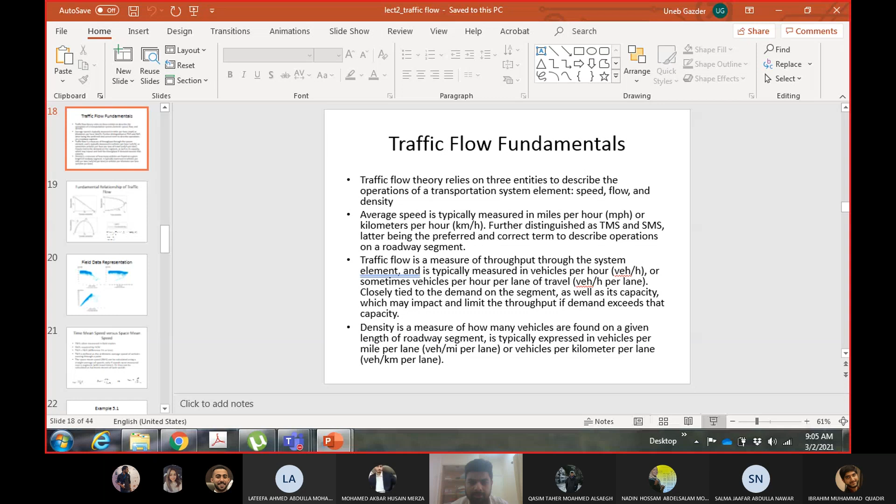Okay, so the topic which we are starting today, we will see a lot of things coming from the traffic engineering course. So it will be a refresher for you. So traffic flow theory depends upon three main characteristics of the transportation system. And these three main characteristics are speed, flow, and density.

Traffic flow theory, let me explain it. Traffic flow theory basically means the set of equations which we have to estimate and predict traffic flow, or the operations of traffic flow. Those set of equations are known as traffic flow theory. So these set of equations mainly depend upon three main characteristics of traffic: speed, flow, and density.

When we talk about speed, for traffic operations analysis or traffic flow analysis, we use average speed. And obviously speed can be in miles per hour, kilometers per hour. I think this much you should know and you will remember. Then this average speed can be TMS or SMS. Can someone tell me the full forms of these terms, TMS and SMS? And these are not messaging services, believe me.

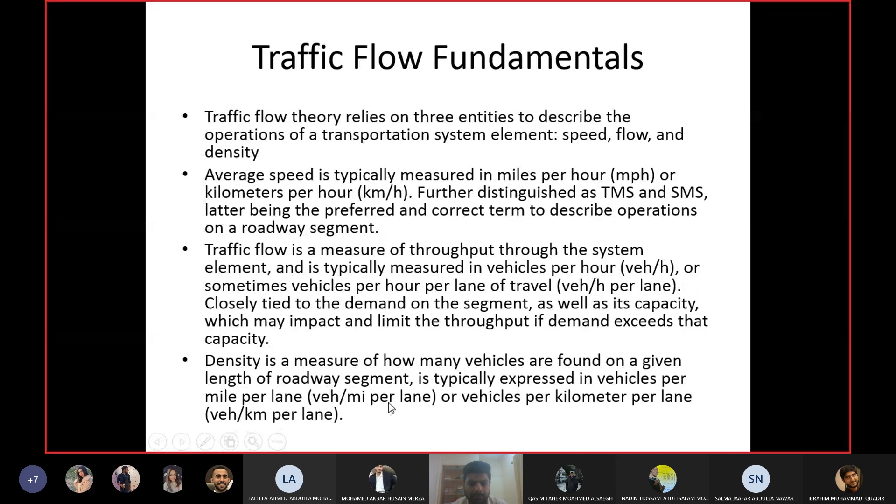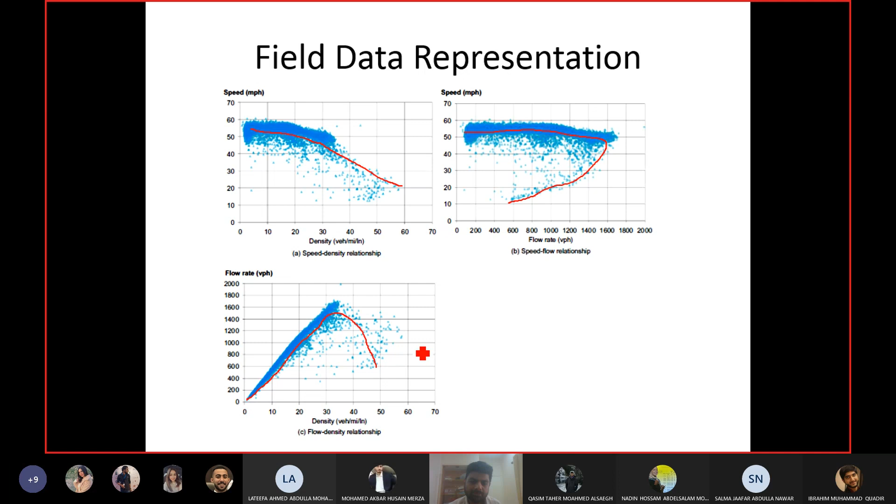So we collect field data, and then we try to come up with some equations which are best suited. I think I explained this in the previous chapter. All models are wrong, but some are useful. So these are the most useful models we have. They have some differences, some errors from the field data, but these are the most useful models we can have.

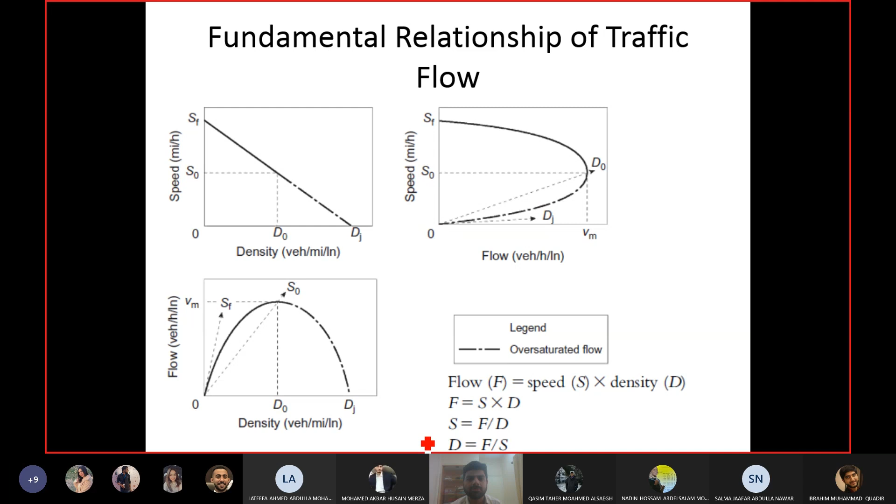Okay. Then we have, like you mentioned, time mean speed and the space mean speed. So now we are going into more detailed discussion of these three parameters, speed, flow, and density. So TMS is mainly used in field studies. So you want to do a field study for a specific purpose, for a specific application, maybe accident analysis, accident investigation, for measuring the effectiveness of a speed bump or a traffic camera or something like that. Then you go for TMS studies. Otherwise, you calculate SMS, space mean speed. And this is the one which is required by the Highway Capacity Manual. So if you want to calculate level of service, capacity, or do traffic operation analysis, then you require SMS.

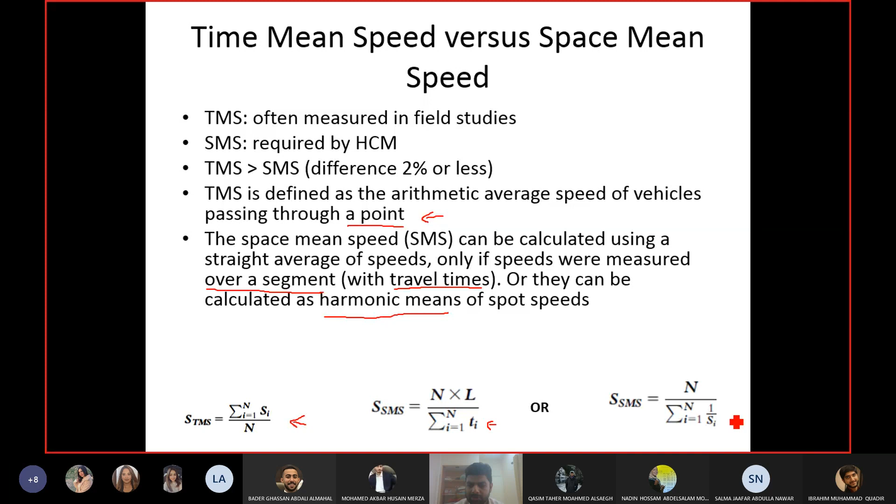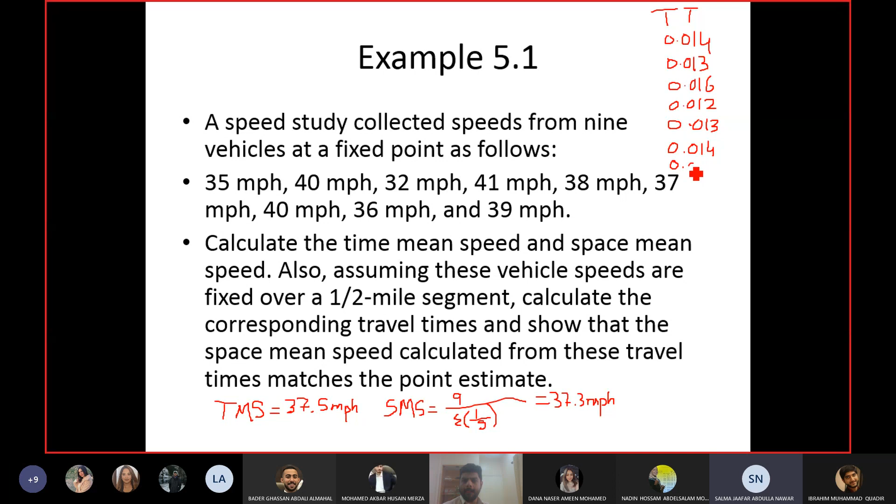The distance remains the same. 0.014. 0.013. 0.016. 0.012. 0.013. 0.014. Okay. 0.013 again. 0.014 and 0.013.

Okay, and their summation will be 0.12. 0.12. Okay, then the other equation of SMS says do 9 into 0.5 upon 0.12. And you should be getting this.

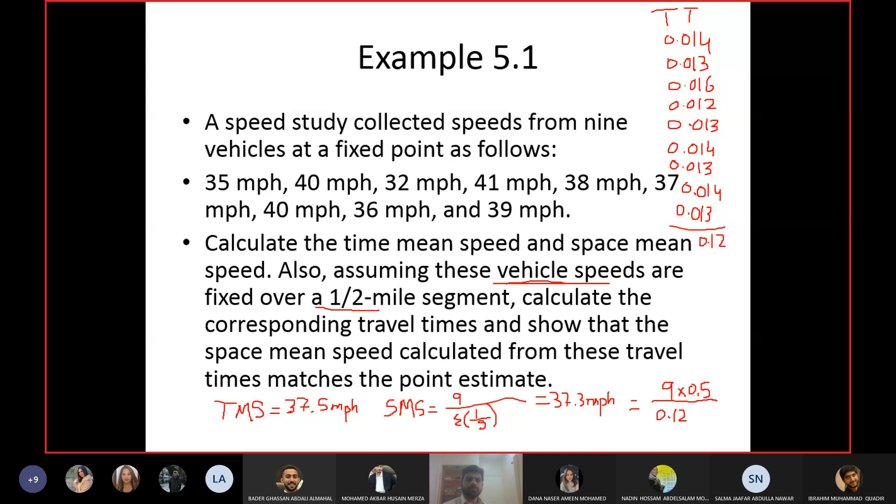Okay, so the parameters which we have discussed right now, speed, flow, and density, these are macroscopic parameters. Macroscopic meaning what? They describe the combined or aggregated. Aggregated means combined. When you are taking a summation of something, compiling something one over the other, that is called aggregation, adding. So this is the combined performance of the number of vehicles. So you take data for 15 minutes for example, and then you come up with a macroscopic parameter which is representing all the vehicles.

And these macroscopic parameters are used for predicting future states of traffic, how traffic flow is changing presently as well as in future. So this will describe the whole traffic flow. These parameters are relative to the whole traffic flow. For example, we just used speed. TMS and SMS were both macroscopic because they were calculated as averages. TMS and SMS came out from those 9 vehicles, so that became a macroscopic parameter because it is coming out of the data of 9 vehicles.

Similarly, the data which you have taken for your term projects, the 15 minutes vehicle counts, these are what? These are flow values. So again, you gave me one value, right? That in 15 minutes we observe this much flow, 600 vehicles, 700 vehicles, 500 vehicles. So this is one value which is coming out of all these vehicles. For the complete flow it is one value.

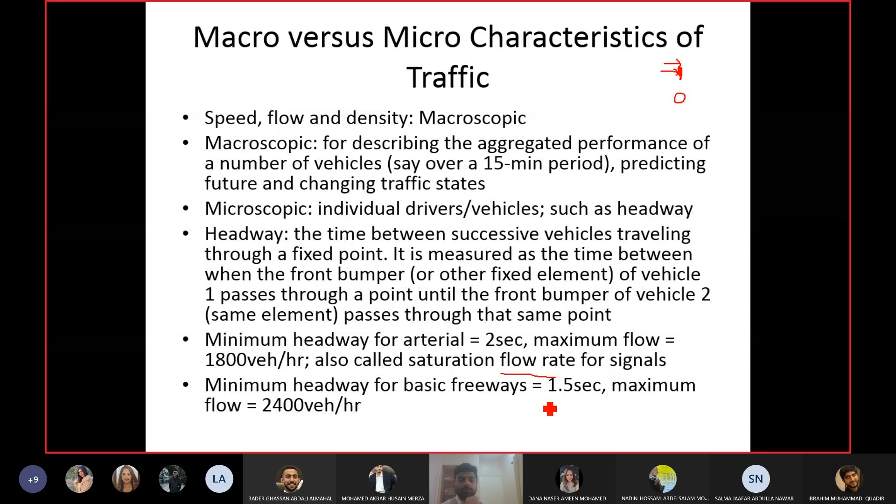And secondly, the headway is inversely proportional with the flow rate. You can see it over here. So when the headway increases, the flow rate decreases. So we have saturation headway, which is basically the minimum headway which you can have, which I showed you in the previous slide. The 1.5 seconds and the 2 seconds are basically the minimum headway.

The saturation headway is basically the minimum headway which the drivers can keep between each other. Saturation headway is that minimum value which the drivers are willing to keep between each other, which they consider safe for themselves. So 2 seconds for arterials, 1.5 seconds for freeways, according to their own data, the data which they have collected in USA. If you have doubt, collect your own data, no problem.

But it is not possible that on all segments of the highway you can attain a saturation headway value, because the headway will increase between the vehicles because of certain conditions on the road. For example, if you have curvature on the road, so the road itself is going along a curve like this, then normally the headway between the vehicles increases. Because of the curvature they are slowing down, so their headway will increase.

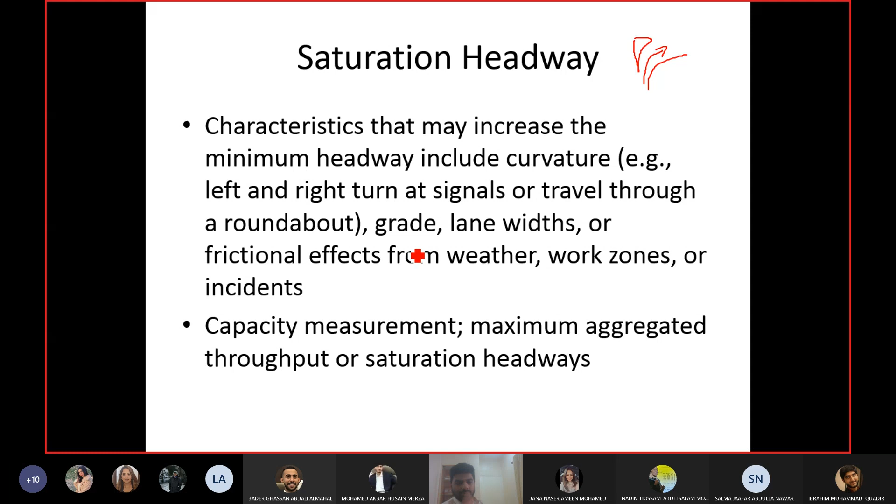So the 2400 and the 1800 which I was showing you, 2400 was the capacity of the freeway, and 1800 can be the capacity of the arterial. These values are coming from the saturation headway. So for calculation of capacity, we have two ways. You can use the saturation headway, or you can use the maximum flow which is happening in the system.

Then we have another microscopic parameter, which is spacing. Microscopic parameters can be many, keep it in mind, and macroscopic parameters as well. They can be many, but we are just discussing the most important ones. So spacing is another important microscopic parameter, and this is the distance between two vehicles.

Which should be taken from a photograph. Obviously, we don't do it. Okay. So it's like at any particular time instant, you measure the distance between two vehicles, again from the same reference point, from the same reference element. So maybe from the front bumper to front bumper, or front wheel to front wheel.

Okay, at any point of time when you measure the distance between two vehicles from the same reference point, it is spacing. Vehicles which are successive, vehicles which are going one after the other. Okay, between successive vehicles. So that is spacing. Headway was the time interval between two successive vehicles. So we can measure it because vehicles are moving.

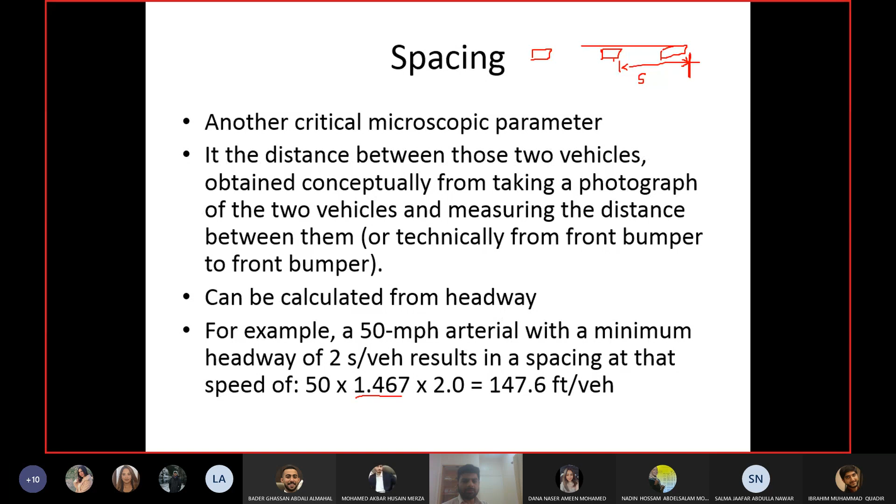Is there any question here? Did you understand the logic behind it? So I'm multiplying the speed with the headway to calculate spacing. Why? Because headway is the time taken to cover the distance between the two vehicles. Now the effect of spacing on speed, and the effect of headway you can see here as well.